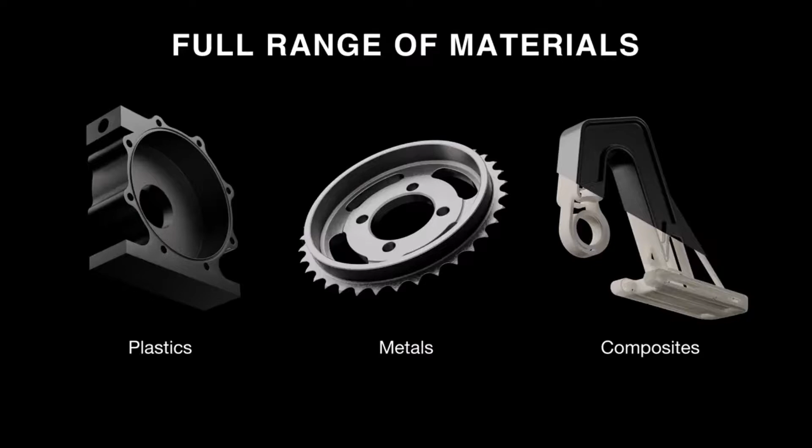Today, we've shipped thousands of machines to customers worldwide, and our customers, ranging from small machine shops to international businesses, use our machines for high-strength, high-quality parts in a wide variety of applications, from tooling and fixturing to functional prototypes to end-use parts. We have a wide network of value-added resellers who provide support, maintenance, and training to our customers.

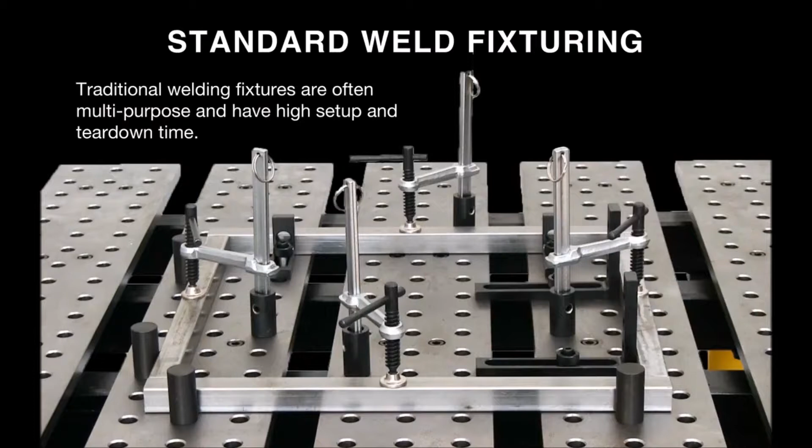Now let's talk a little bit about welding fixtures. Welding is frequently done on a welding table where parts are clamped down with a series of clamps, jigs, and alignment features. Often these fixture clamps and guides are general use tools for a variety of setups, and as a result, they can take a long time to set up and may not be suited for specific jobs.

Now for something like a bicycle welding frame, it's a little bit more generic and modular, but for something more unique for a specific product on a product line, these fixtures can be very costly because each part of the fixture needs to be designed, drawn up, sent out to a shop, and it may take a few weeks to get that part back from the shop, and depending upon the fixture complexity, could be expensive.

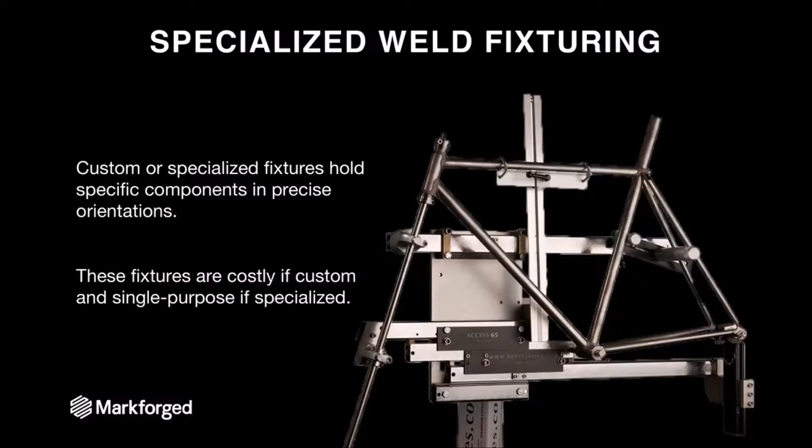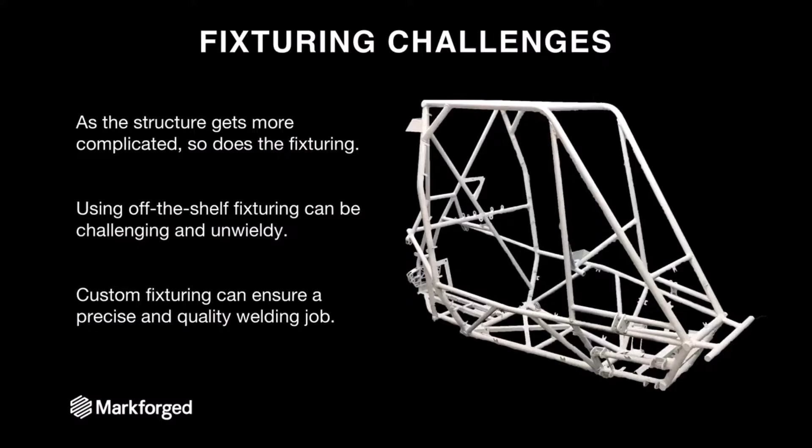So often custom fixturing requires a higher initial investment because each piece of a fixture needs to be machined and has long associated lead times. As your welding operation gets more and more complicated, so does the fixturing, and this is where the real challenges lie, because for more complex 3D structures, using off-the-shelf fixturing can be challenging and unwieldy, and especially if you are in low-volume production, a custom fixture will ensure a more precise and higher quality welding job, but may not be achievable at that point.

So where can 3D printing help? In general, 3D printing can assist in many of the fixturing and setup needs required of welding by complementing existing welding tools and technologies with its own advantages. I'm going to be covering in general the 3 benefits 3D printing can provide for welding, and later show specific use cases that exemplify these benefits.

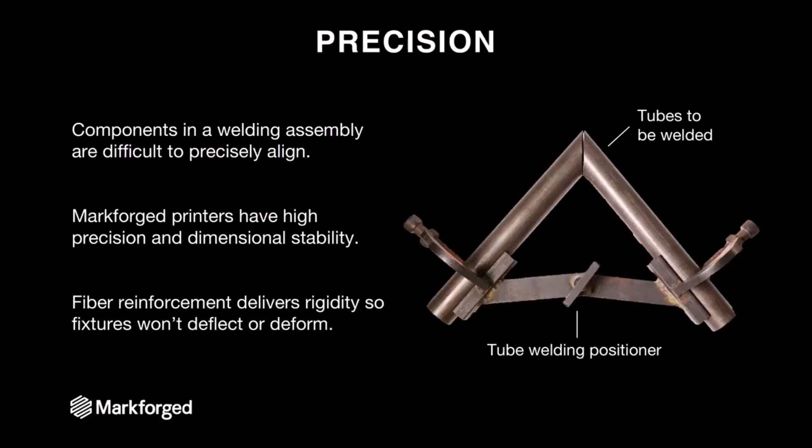Where 3D printing can fit in with precision is by providing high precision and dimensionally stable fixtures that can keep and hold your welding tubes rigid during setup or during the welding operation.

Now let's move on to setup and teardown. By 3D printing custom welding fixtures, you can drastically reduce the setup time on your welding table. Each clamp on a setup and each alignment feature needs to be located, supported, and aligned every single time you're setting up a job for welding, and this only takes more time with each additional tube or clamp. So features on a custom fixture can make it very easy to drop in your part on your fixture and have it be precisely located and aligned.

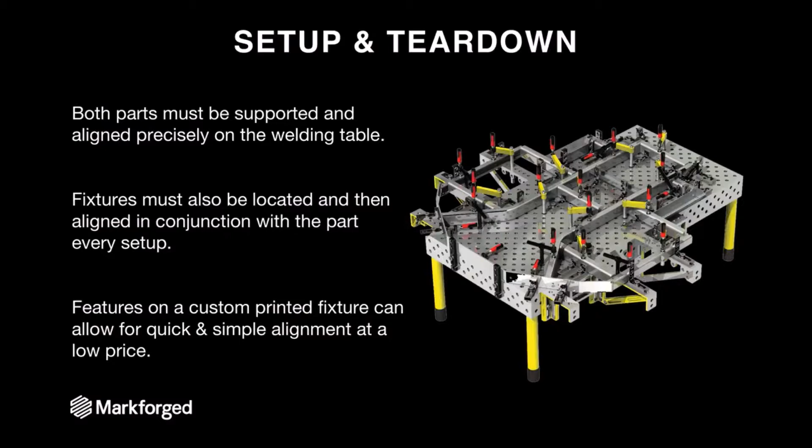The last overview that we'll cover is cost. One of the huge benefits of Markforged printers is their ability to replace custom machined components, because the fiber reinforcement allows for the strength of metal at a fraction of the cost. Some of our customers have seen up to 95% cost reduction on printed versus externally machined parts.

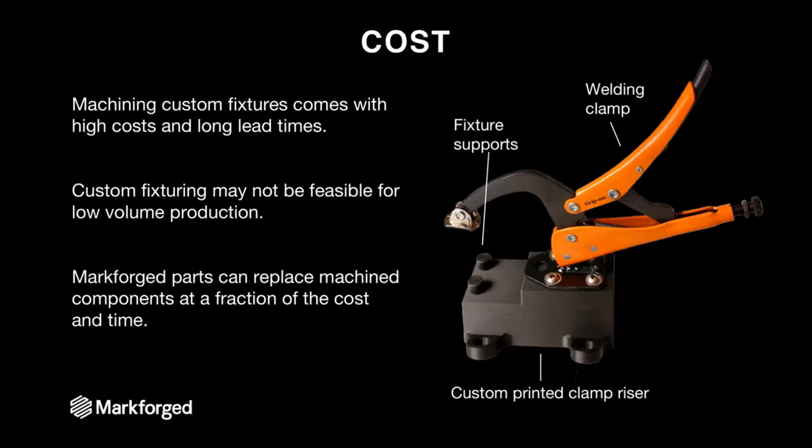For custom fixturing, often for more complex welding operations, custom fixturing could be out of budget because you're spending a lot of time and money getting a very specific part machined. By printing your fixturing for welding, you can save costs and time instead of having parts machined, getting your fixture at a fraction of the price, ready to put on the welding table the next day instead of waiting 2 or 3 weeks for a custom machined component.

Now let's talk about some implementation examples. First is printed fixturing. Complex structures with non-standard geometries are difficult to fixture, and traditional fixtures can make the process lengthy, but custom fixturing is costly. Printing fixtures is an affordable solution for tack welding steel, and this can simplify a setup because it allows you to align and locate your pipes very easily.

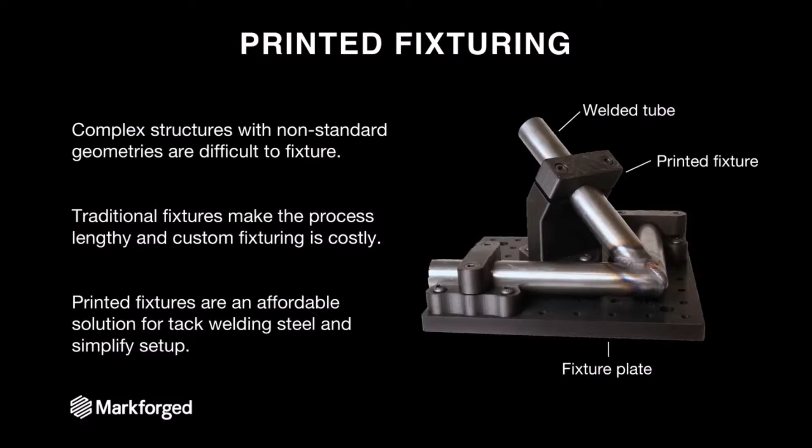One reason this works is that our parts have a heat deflection temperature of about 150 degrees Celsius, so for tack welding, where the heat is very concentrated, this is actually a feasible solution. As long as the fixture points are well out of the heat affected zone of the part, they can hold up. Here's a video showing a welder using one of our Markforged fixtures to weld this frame structure.

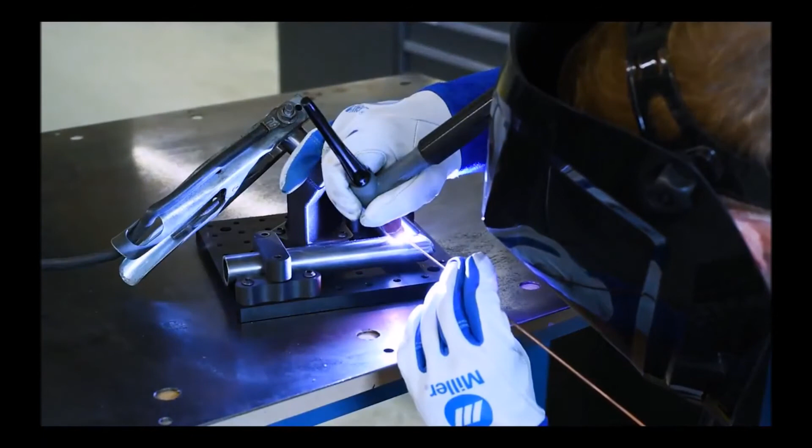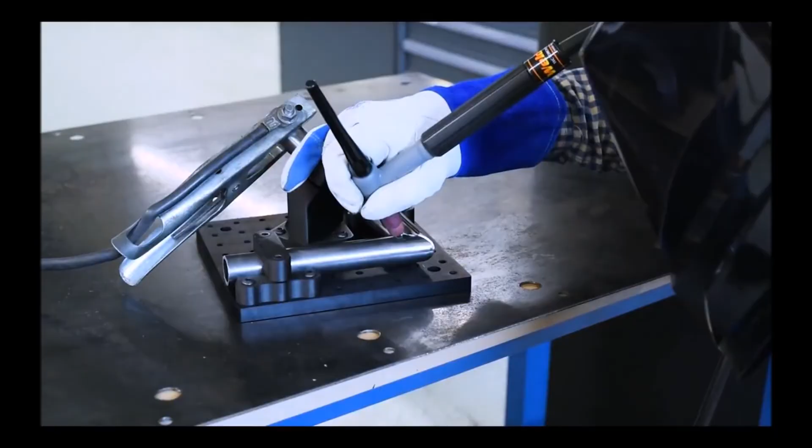As mentioned, Markforged materials have a high heat deflection compared to other 3D printing plastics and can actually withstand the heat from tack welding. We were TIG welding steel tubing, and after the tack welding operation is complete, the part can be taken off the fixture, and the welding operation completed after the tacking is done.

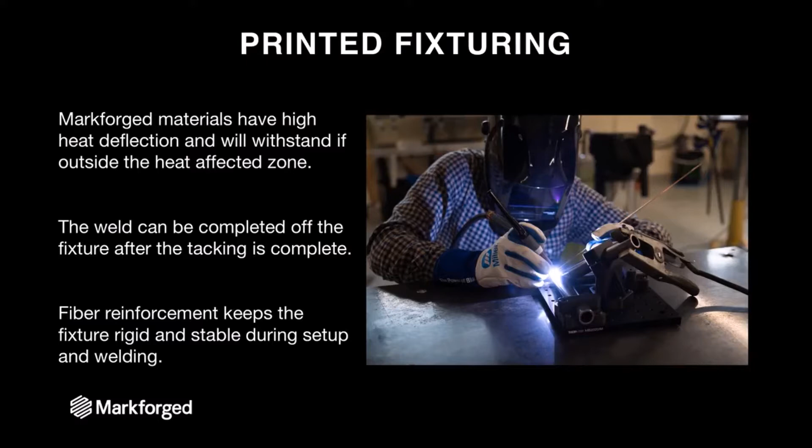One other benefit is that you can reinforce these parts with continuous strands of our composite fibers, like fiberglass, which keeps the fixture rigid and stable during the setup for welding, so you're guaranteed you're holding your components in the right place as you're setting up your fixturing.

The next application is custom risers and mounts. It may be necessary to keep the frame you're welding in a fixture during the entire welding job, and a lot of times standard welding fixtures do not guarantee a repeatable process. For example, this clamp in the photo requires a lot of setup and moving around to get it to the right spot.

With odd orientations like this, it increases the cost of machining and lead time because you're making this odd clamping part that needs to hold the pipe in a particular orientation. Things like this can also be printed, and one benefit is that it's possible to use custom printed risers and mounts throughout the welding job, making it a cost-effective and easy process.

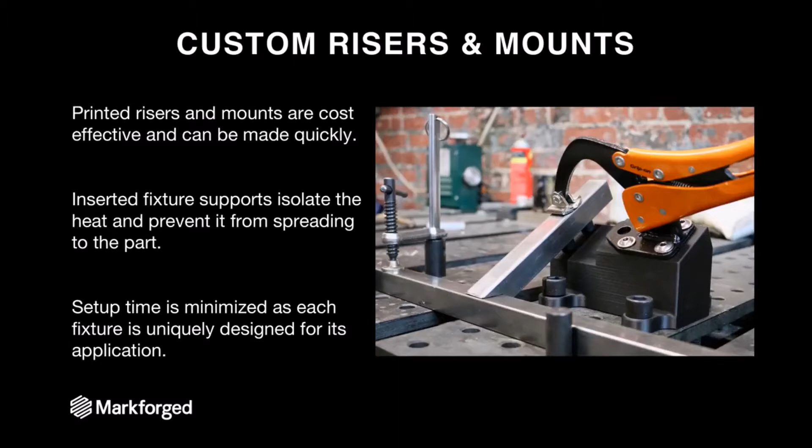In this photo we have a custom printed clamp mount holding a part at a 60-degree angle so it can be welded at the joint. We have pressed-in fixture supports supporting the beam and a clamp bolted into the fixture that holds that beam in place.

For standoffs or supports like this, going with a stainless steel fixture support or clamp as the point of contact will actually isolate the heat around the part if the heat reaches that area. That means it won't really permeate into the part and you can continue with your welding operation.

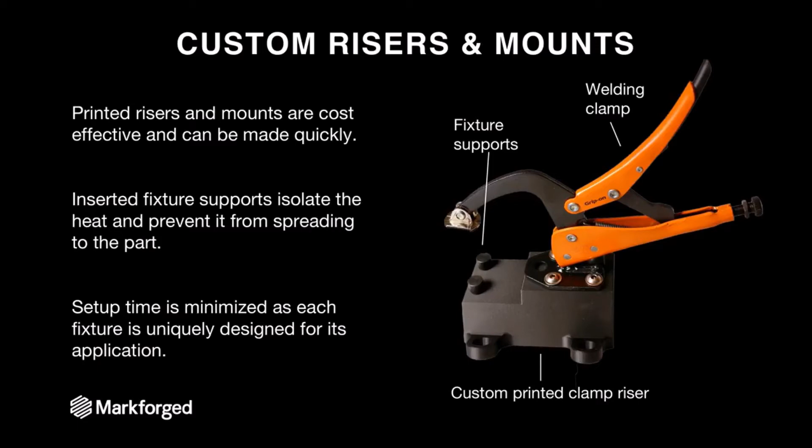So you don't have to deal with trying to precisely locate and align your tubes with modular fixtures. Setup time is minimized as each fixture is uniquely designed for its application. In general, this reduces cost by eliminating the need for custom machined fixtures while increasing the quality of your final part, since your beam is in the right location, overall streamlining the setup process.

The last application I'll discuss is alignment jigs and check gauges. Often modular welding fixtures are imprecise and can lead to alignment issues during or after welding, and it takes time to adjust these types of fixtures to achieve the results you want.

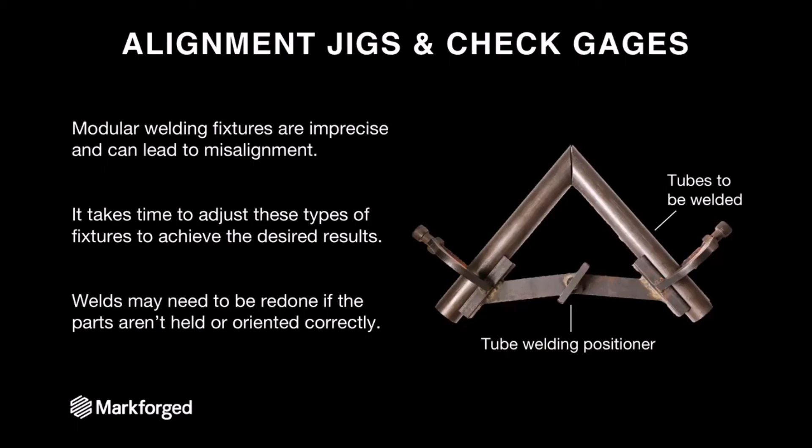In some cases you may tack your pipes together and realize after the entire thing is set up that you'll need to redo some of the welds if the parts aren't held or oriented correctly. So even if you don't intend to use the printed fixture directly in the operation, maybe using more conductive or higher temperature materials, 3D printed parts can still be used as alignment jigs.

A printed jig will work together with a more modular clamp or fixture to ensure proper part alignment during setup. This decreases setup time and allows welders to confirm their setups are correct on the first try instead of having to weld and then re-weld after realizing the setup was imprecise.

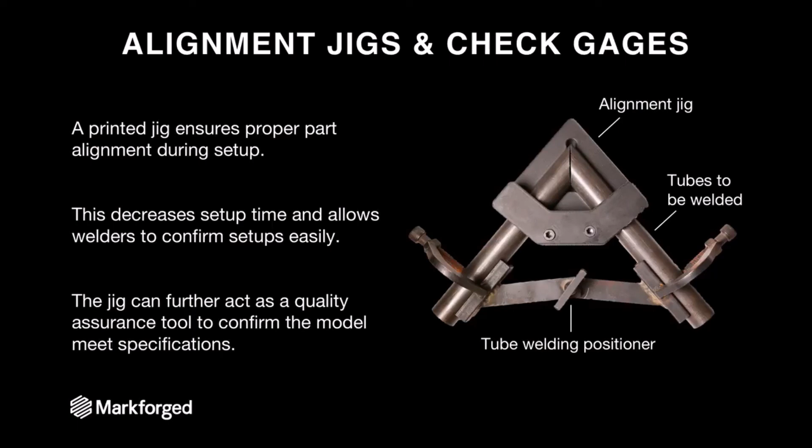Furthermore, the jig can act as a quality assurance tool after the welding operation is complete to confirm the model specifications. So both before and after the process, you can use the fixture you've designed to ensure your part meets your quality standards. This helps reduce setup time, minimizes job failures, and ensures your end result is a high quality weld that meets the standards you want.